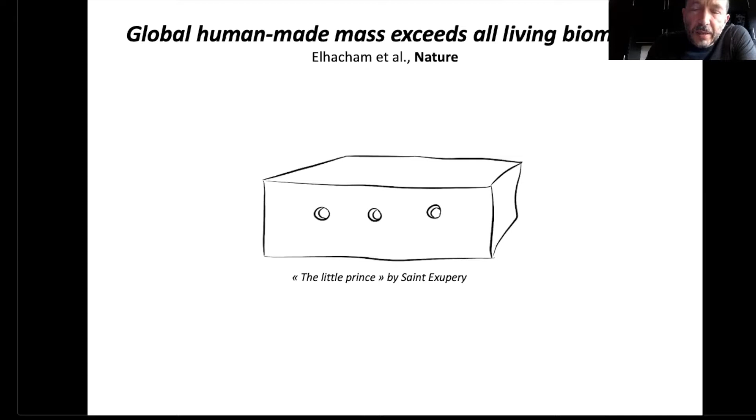A big fraction, probably more than half, of this global human-made mass comes from construction materials, as everywhere possible, we try, all of us, to provide people shelters or boxes to protect themselves from the environment. Among construction materials, there is one that is really leading and dominating, and this material is concrete, also called liquid stone.

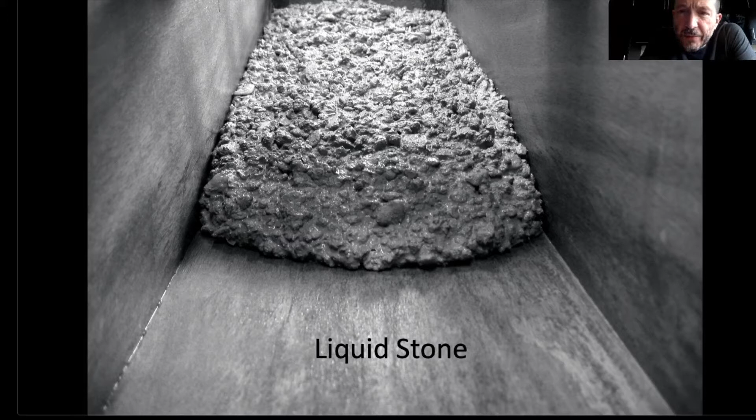Most of you are probably familiar with the stone features of this material, its hardened properties, its strength, and its durability. But today we'll focus on the liquid feature of this material, the way that it flows, why it flows like that, what is its rheological behavior, and what is the relation between fresh properties and processing or shaping of this material. So to do that, we'll have two parts in this lecture.

In the first part, I'll speak about rheology and the underlying physics at the origin of this rheological behavior. In the second part, I will focus more on material processing and try to show you that if we exclude pumping and mixing, which I will not speak about today, material processing or shaping for concrete is a competition between gravity-induced stresses and the consistency of the product.

Of course, it's a very large, wide topic. I won't have time to speak about everything. So I'm providing you here some keywords linked to this topic that you can use to find relevant literature, and I'm suggesting here 4 books, from the first, Rheology of Fresh Concrete by Tattersall and Banfill in the 80s, to the last one, Theory and Application of Colloidal Suspension Rheology, with a full chapter dedicated to cement-based material by Wagner and Mewis.

Let's start with something typical of rheometry, the flow curve. Flow curve is what people doing rheometry plot. It's shear stress as a function, not of deformation like we do for solids, but as a function of deformation rate, the speed at which you deform the material. What people also plot is apparent viscosity, the ratio between shear stress and shear rate, as a function of shear rate.

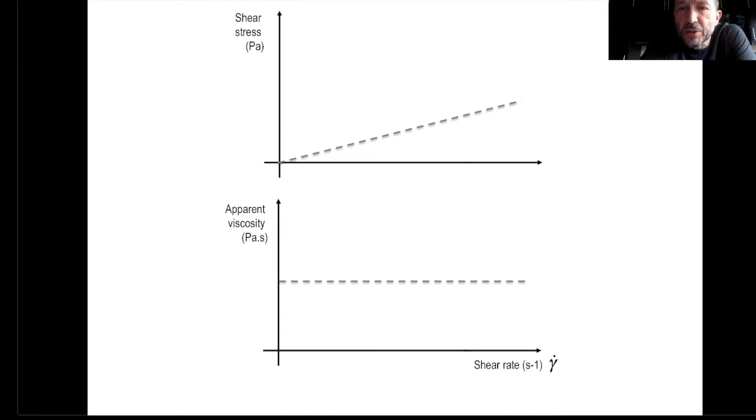So in such diagrams, water, a Newtonian liquid, would look like this: a constant apparent viscosity, a constant Newtonian viscosity, and of course a shear stress that increases linearly with the shear rate. Well, cement-based material looks very different.

The main feature that we will spend some time on today is the fact that this material displays a yield stress. This means you need to apply to this material a critical stress above a threshold for the material to flow. Above this yield stress, the material flows and its viscosity decreases with the shear rate, and this is called shear thinning.

If you go to higher shear rates, you can even reach a Newtonian plateau where the material looks like a Newtonian fluid, but this corresponds often to shear rates that are not of interest for industrial practice. So we are mostly facing a yield stress material with a shear thinning behavior above the yield stress.

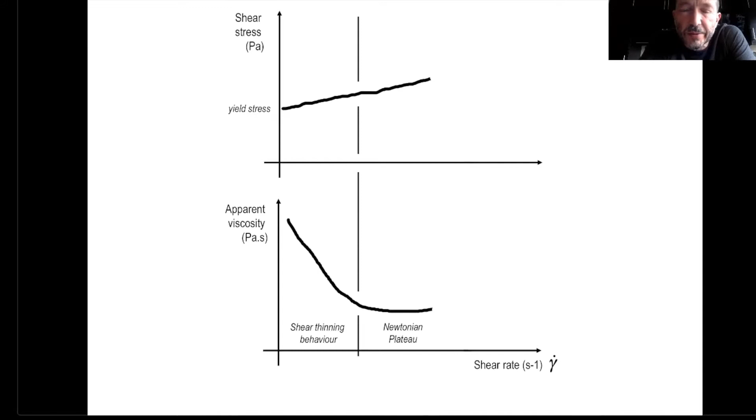Let's try to discuss the origin of such a behavior. To do that, I'm going to focus on the cement particles that are at the origin of the behavior. The sand grains, the gravel, have been shown to only amplify the behavior at the level of the cement particles. And we have at this level particles from 100 nanometers to 100 micrometers for the coarsest.

They are mixed with water. And the phenomena at stake that have been identified are Brownian motion or thermal agitation, gravity potential energy due to the fact that there is a difference in density between the cement grains and the liquid, and colloidal potential energy for this type of size.

100 micrometers is quite big for colloidal particles. 100 nanometers is really a good range. And these create some non-direct interactions, repulsive or attractive.

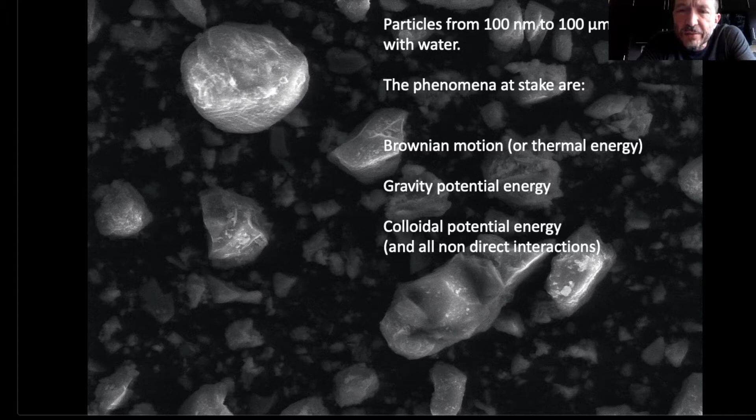In the case of cement, all these phenomena are studied in detail. So we often choose to consider as a reference Brownian motion or thermal agitation, because it's something that can be easily assessed. And we have as well some colloidal interactions. They were shown to be mostly attractive van der Waals forces.

In fact, they do not take much into account the diameter of the particle. They are more concerned with the diameter or the equivalent size of the asperities on the surface of the cement grains.

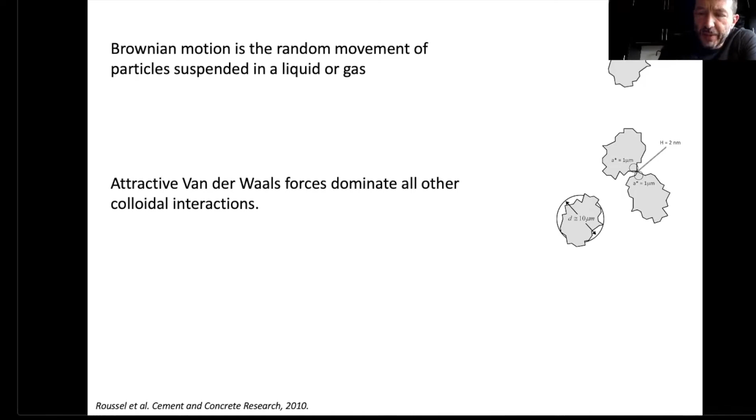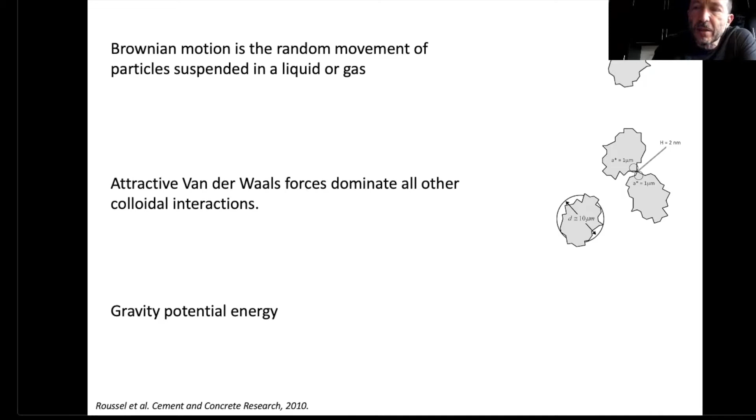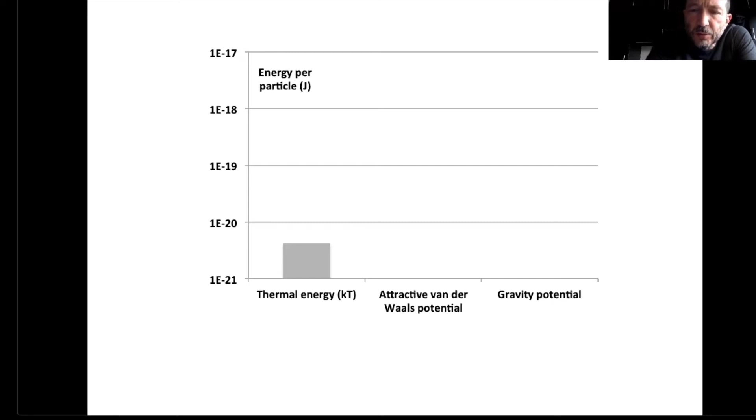And we have, as already discussed, some gravity potential energy that could induce sedimentation of the cement grains. It is possible to get an idea of the magnitude of these various energies or potentials and to compare them. That's what we do here. As already stated, I take as a reference the thermal energy, kT, K being the Boltzmann constant and T the temperature in Kelvin, and I compare that to the two other potentials or energies in the system.

First thing, gravity potential is systematically higher than thermal energy. This means that thermal energy is not able, through thermal agitation, to maintain the particles in suspension. As a consequence, cement suspensions are unstable by nature. So they do sediment, they do consolidate, and we expect these particles to be either too coarse or too heavy to be stable.

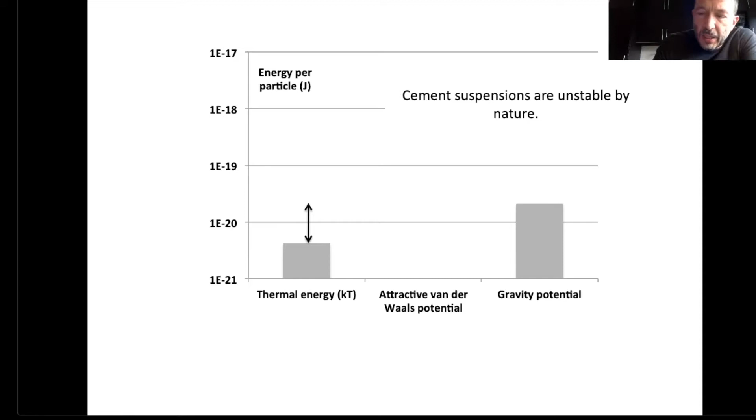In parallel, the attractive van der Waals potential is systematically far higher than thermal energy. So it means that particles will get attracted to each other and form flocs. And these flocs are stable, because thermal energy is not able to destroy this floc through thermal agitation or thermal dispersion.

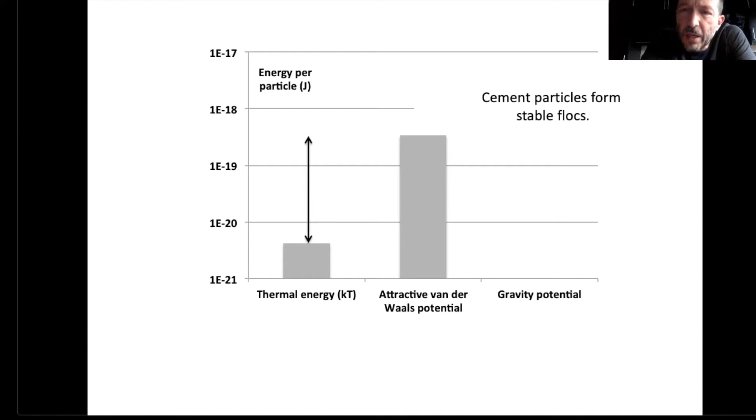Finally, if we have enough particles in the system and they get percolated through the formation of this stable floc, then the system will get a macroscopic yield stress that you will need to overcome for the particles to move relatively to each other and for flow to start.

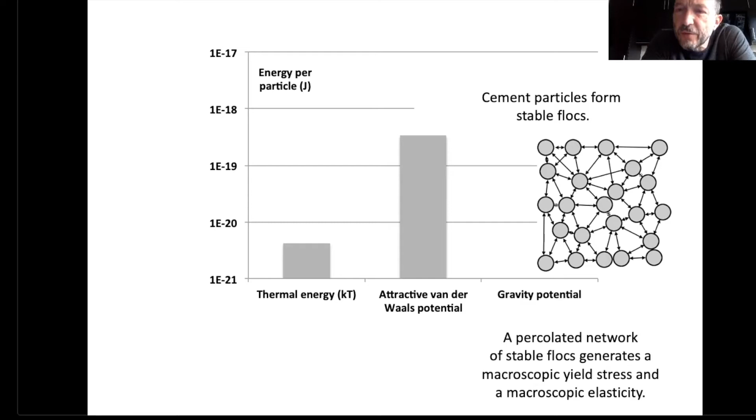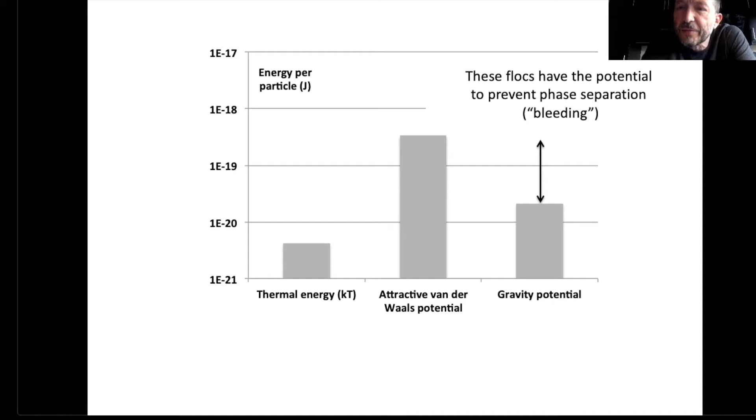And last but not least, gravity potential is systematically lower in magnitude compared to the attractive van der Waals potential. It means that the flocs being formed are stronger than the gravity-induced potential, and these flocs have the potential to prevent phase separation or bleeding and make the system stable.

So all in all, cement pastes are unstable by nature because cement grains are either too heavy or too coarse to be suspended in water. But particles do flocculate because of some attractive van der Waals interaction at the level of the cement grain surface defects or surface asperities. If there are enough particles in the system, meaning a water to cement mass ratio that is low enough, the network of interacting particles is at the origin of a yield stress.

And this network is so strong that it is able to keep the particles captured, preventing them from moving, which allows the system to become stable and which allows providing a cement-based material that can be used by industry because it is stable.

However, we cannot forget that cement powder is a reactive powder. And even if we are in the dormant period and all chemical reactions at this stage are often neglected, it has been shown that there is a lot of dissolution and a lot of nucleation. And this nucleation happens at the pseudo-contact points between the flocculated cement grains.

As a consequence, in the first 10 to 100 seconds, the particles will flocculate through a diffusion aggregation process typical of colloidal suspensions. And after that, the system will be reinforced by the nucleation of hydrates at the pseudo-contact points. So what matters for us and for the second part of this presentation is that after mixing or after flowing, when the material is at rest, we build a yield stress because of two mechanisms.

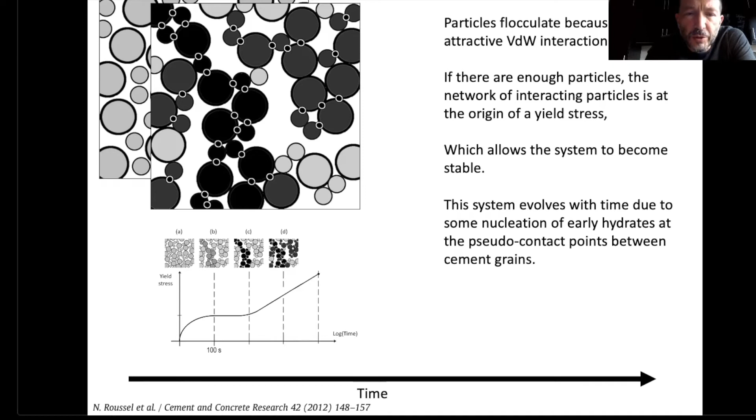One of them is flocculation, the second is structuration through nucleation, and all in all, the yield stress is increasing with time. So let's move to the second part, material processing, and I'm going to come back to this picture I used because I think it illustrates quite well the fact that concrete industry is mostly a molding industry.

So for a long time, the main dominating shaping process that we use is molding. In most cases, everything goes fine. Gravity, the density, the weight of the material induces stresses inside the material that are strong enough for the material to flow and fully fill the mold.

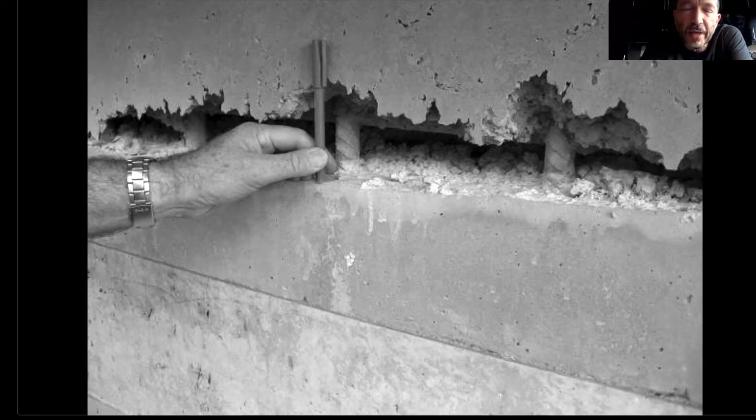In some other cases, unfortunately, it is not the case, and you can find some voids or some defects that even vibration is not able to make disappear. So to analyze that, the main idea of this presentation is to speak about gravity-induced stresses and compare these to the consistency of the material.

And we're going to have three parts. The first part, gravity is your only partner. Gravity is helping you shape the material. The second part, gravity is helping you, but gravity is not enough. You need to bring some additional energy. And in the last part, gravity becomes your enemy and consistency needs to be high enough to fight against gravity.

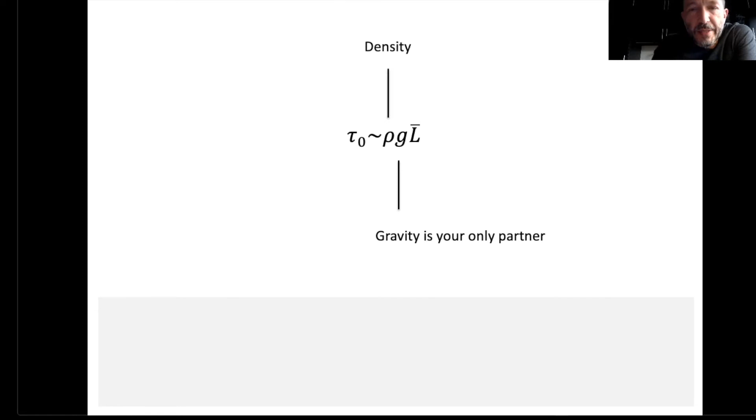So to do that, we're going to use only one relation. It's a very simple dimensional relation that opposes the consistency on the left and gravity-induced stresses on the right. So we are in the first case, gravity is your only partner. If gravity is playing a role, then density, of course, appears in the right part of the equation, and it is competing with yield stress or consistency of the material in Pascal. For this relation to be dimensionally correct, we need a typical length scale of the problem, and this length scale is teaching us many things.

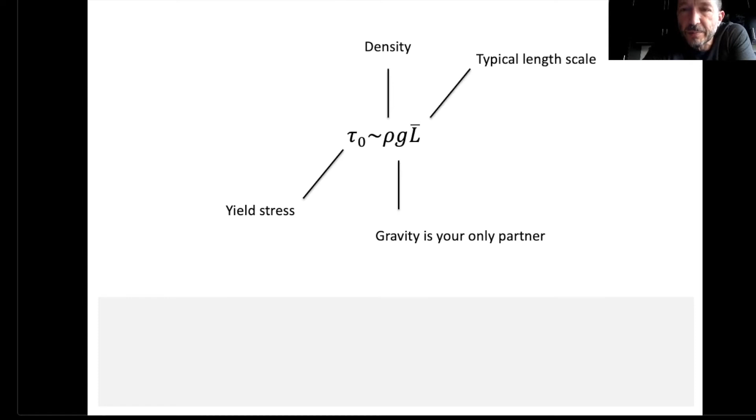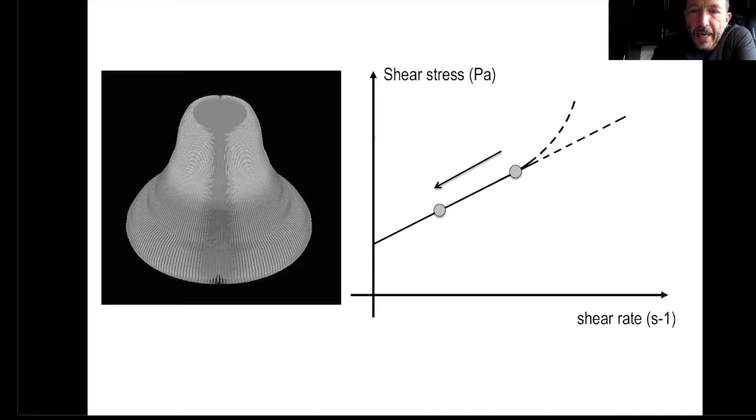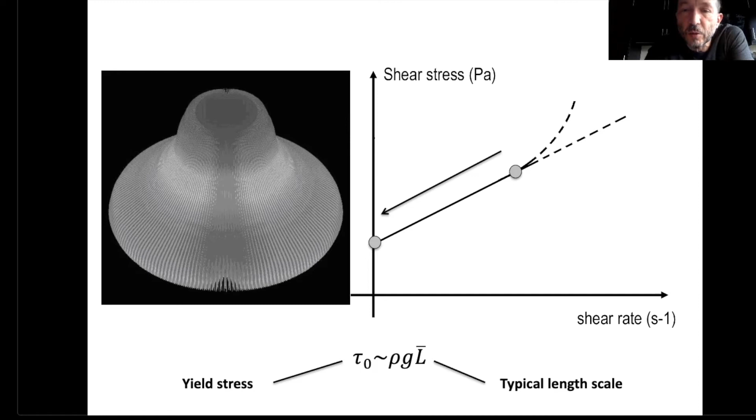First, an illustration of this relation is a famous test representative of the first attempts to measure rheology for cement-based materials: slump or slump flow. We have a material in a cone, then we lift the cone and the material flows, because the stress induced by gravity is higher than the yield stress of the material. So it starts to slump, and as it slumps, the typical length scale, here the height of the sample, decreases and the flow slows down. It slows until the stresses induced by gravity inside the sample equal the yield stress. This is an illustration of the basic relation between a length scale and a yield stress, and it explains why this test is so efficient at capturing the yield stress or consistency of a cement-based material.

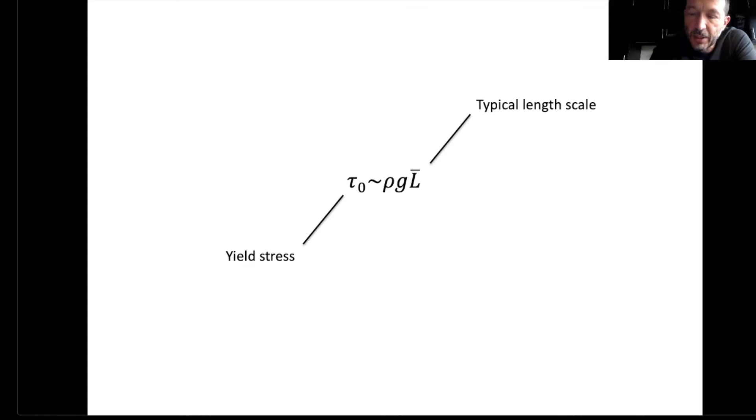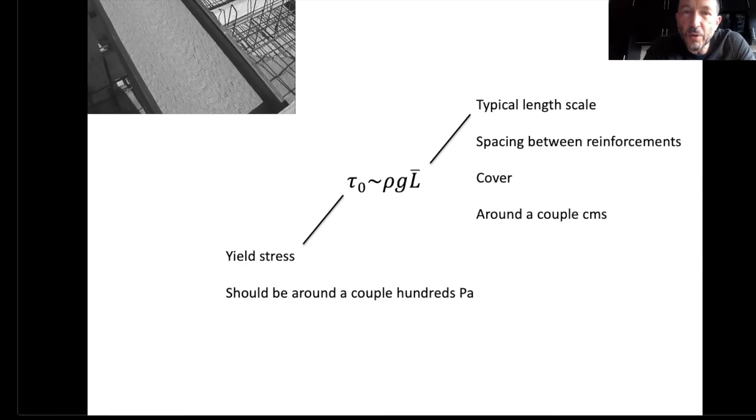Another consequence of this relation is so-called self-compaction. Coming back to the relation between yield stress and typical length scale: imagine the value of yield stress below which I can fill all the molds, including the delicate and narrow parts between steel bars. What is the critical value below which gravity will be sufficient to cast anything? This length scale is of the order of a couple centimeters, meaning the yield stress for typical density concrete should be around a couple hundred Pascal. And this is indeed the yield stress of self-compacting concrete or mortar—a yield stress so low that the material fills most formworks, even complicated ones, and goes through very dense steel bars.

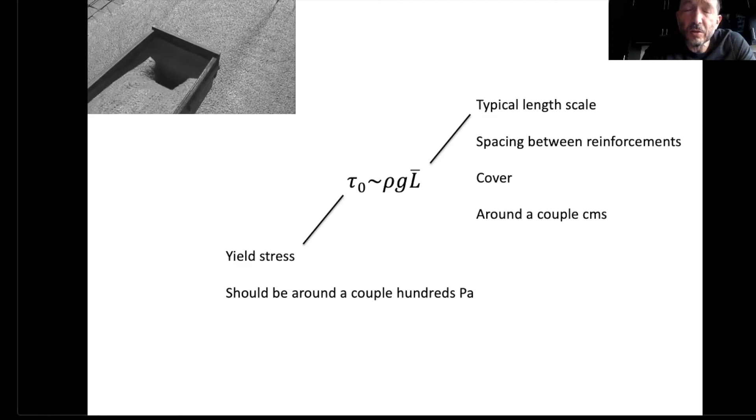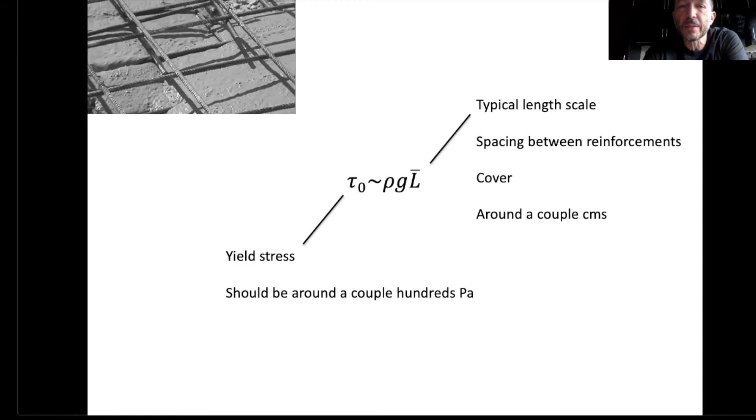But keep in mind we can't design materials with no yield stress at all. That would be perfect to fill anything, but with no yield stress we'd face the stability difficulty already discussed. We need a yield stress at the level of the cement paste for it to be stable, and this cement paste needs to carry the aggregate in suspension. So we will always need a minimum value for this yield stress. But if it stays lower than a couple hundred Pascal, we are able to fill most molds and formwork in most conditions.

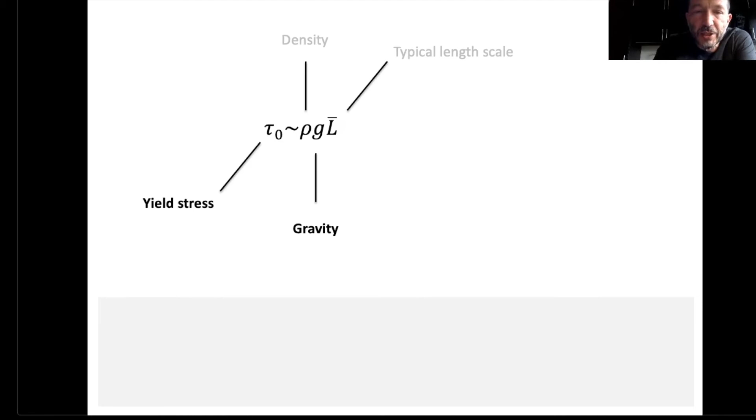Let's move to our second part, when gravity is not enough. Density cannot be changed—if you have difficulty casting a given cement-based material, you won't change density because of that. The typical length scale is imposed by the object you want to produce. So you can play on two things: yield stress or gravity. You could decrease yield stress using admixtures, which is out of scope for this lecture today. But if you don't want to change the mix design, you can change yield stress using internal vibration.

Internal vibration, the insertion of a vibrating poker inside the material, imposes locally a high frequency periodic shear rate, and it destroys the structure of the material—destroys the network of interactions at the level of the cement grains. The yield stress turns to zero for a short time, easing placement of the material, with of course the risk of instabilities if you vibrate it too long.

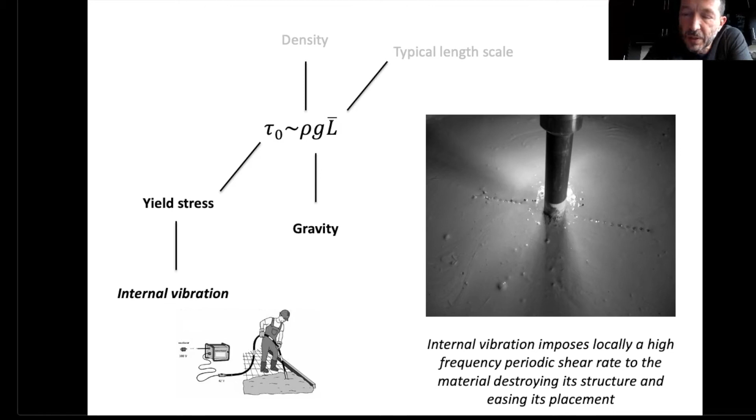The other possibility is external vibration. With external vibration, you don't touch the material directly, but you replace the acceleration of gravity with an artificial external acceleration, with a dependency on amplitude—often limited because we're trying to vibrate very heavy, very big objects—and on frequency. Here we're speaking about amplitudes around 1 millimeter and frequencies around a few tens of hertz. This, often used in precast, allows for perfect molding of the system when gravity is not enough for a full molding and full flow of the material inside the mold.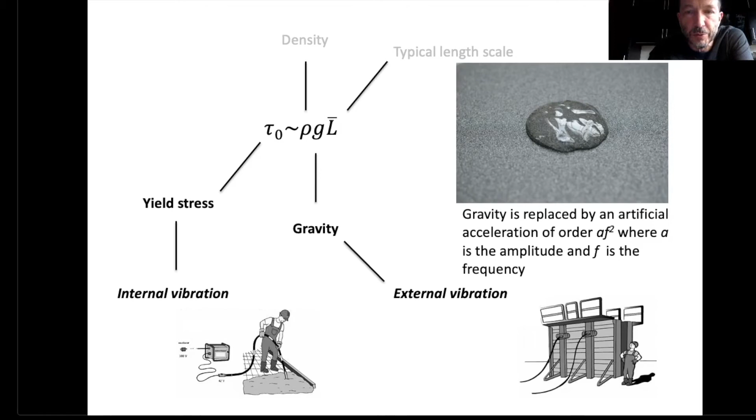The last part deals with the case where gravity is your enemy. The most obvious example is spraying, or rendering. You can apply a mortar, as shown here, or concrete for tunnel lining. In this case, the problem still uses the same relation, except this time the yield stress must be higher, not lower, than the gravity-induced stress. For the material to stick on the wall, for example a 2 cm layer of render mortar, the yield stress must be at least equal to 300 Pascal.

And this is the first case where you, in fact, have to fight against gravity. You want the material, because of its consistency, to be able to resist gravity, whereas before gravity was the stress pushing the material inside the mold and guaranteeing that your process and your shaping will be fine.

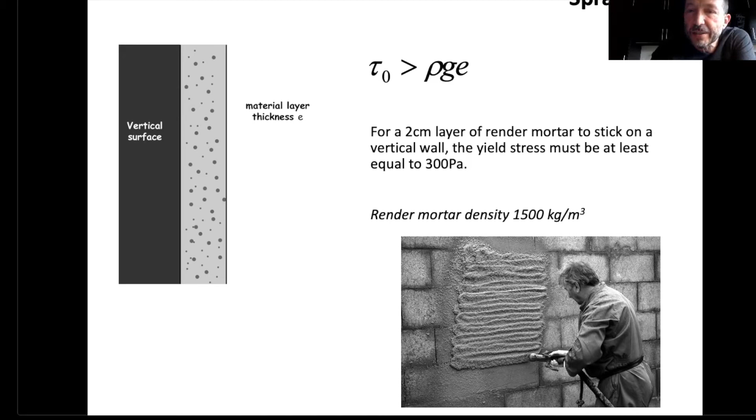The second example that is more recent is extrusion-based additive manufacturing, or so-called 3D printing. In such technologies, you have a robot allowing you to deposit material layer by layer until you build a 3D object from scratch, and the freedom of shape is amazing, and the possibility to build different structures is something that really needs to be explored.

I'm giving you here a few values about the layer thickness, which is called as well the resolution of the printing. 10 centimeters is when you print concrete, 1 millimeter you are mostly printing grout or paste. The layer width is varying as well. You can print up to 3 meters in most cases. We could go higher, but I don't have examples. And you can even print a house with a printing perimeter around 50 meters. And the printing rate, not for houses of course, but for columns, can go up to 10 centimeters per minute.

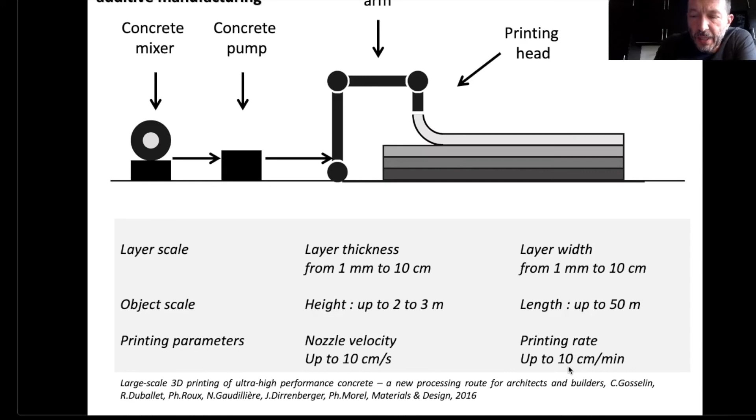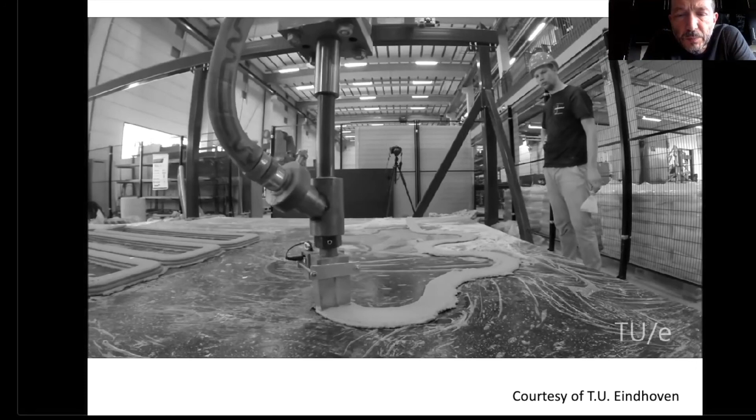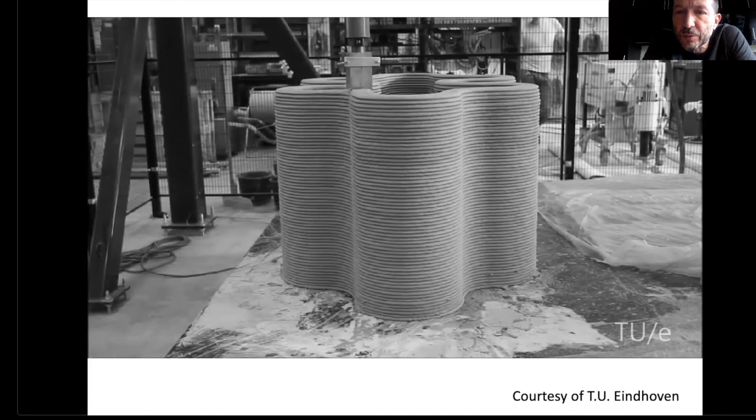Here I'm going to show you an example. This is the way that the material is printed at the Technical University of Eindhoven. We can see that first we need the material to have a yield stress that is high enough for the layer that is deposited to be stable, to have a controlled shape. But then the stress inside the system is increasing as you print, because you are superimposing layer by layer, and the gravity-induced stress is progressively increasing.

So let's first have a look at the yield stress that is required for the layer to be stable. We have two cases. Some people do free flow deposit where the material is very fluid and then builds up a structure because of thixotropy, nucleation, structuration. On the other hand, you have people printing in a mode called infinite brick extrusion, where the material yield stress is quite high, and the material shape is mostly controlled by the initial consistency of the product.

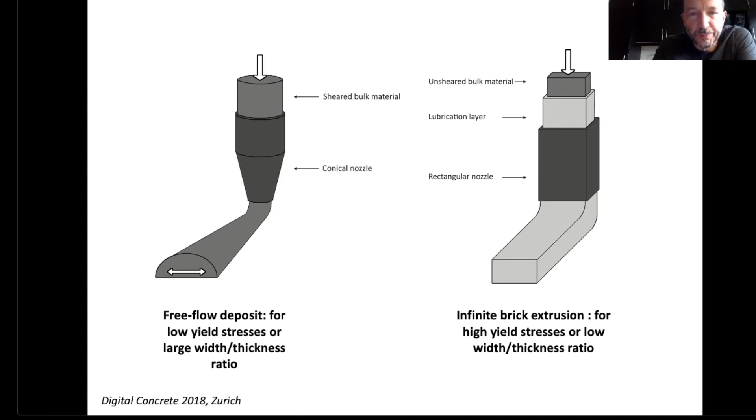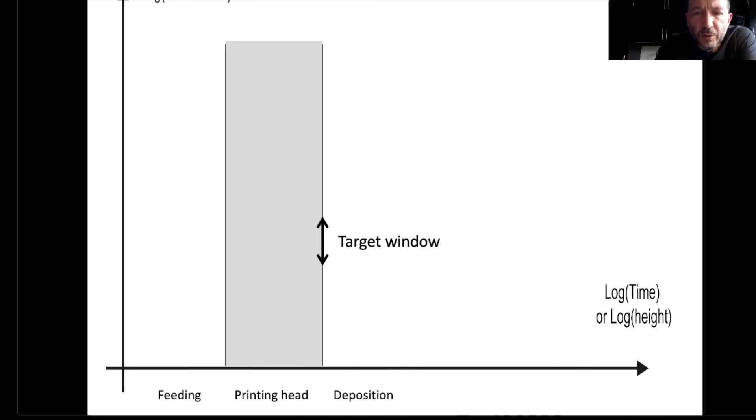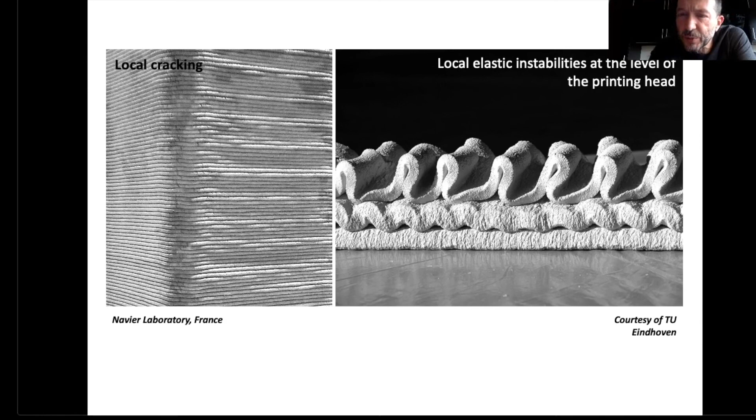Here we have, at the level of the deposition, a target window for yield stress. It means that the yield stress of the material must be high enough for the layer to have a controlled shape. At the same time, there is an upper limit because some artifacts or problems do appear when you have a material that is too stiff. For example, if your stiffness is too high, you can have some local cracking in the sharp angles being printed, also local elastic instabilities at the level of the printing head if there is a slight difference between the extrusion velocity and the robot velocity.

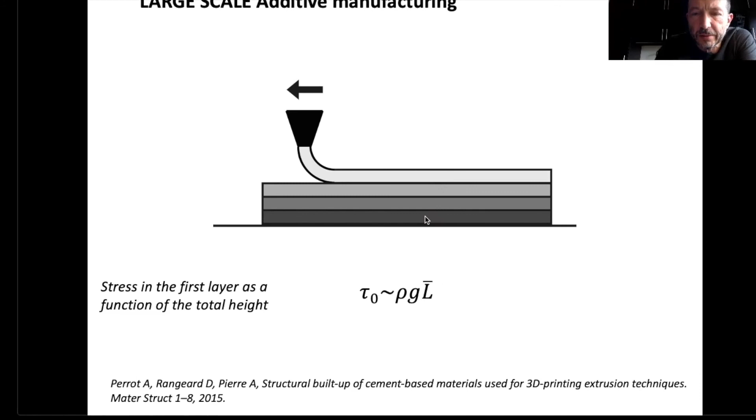But all in all, we can still apply the same relation between a gravity-induced stress, which this time is increasing with the number of layers that have been printed, and the consistency inside the first layer. This would require that the yield stress of the material increases linearly with the printing time or with the height of the printed element. So here we are facing a technology that requires different values for the yield stress, at least a value that is evolving with time, which is perfect for cement because cement naturally is changing with time as we discussed previously.

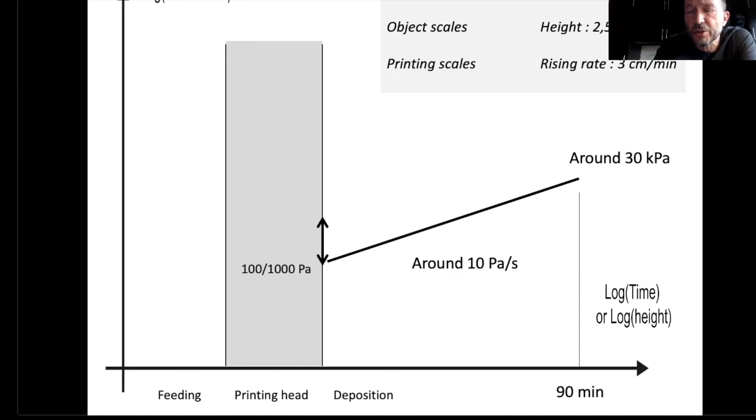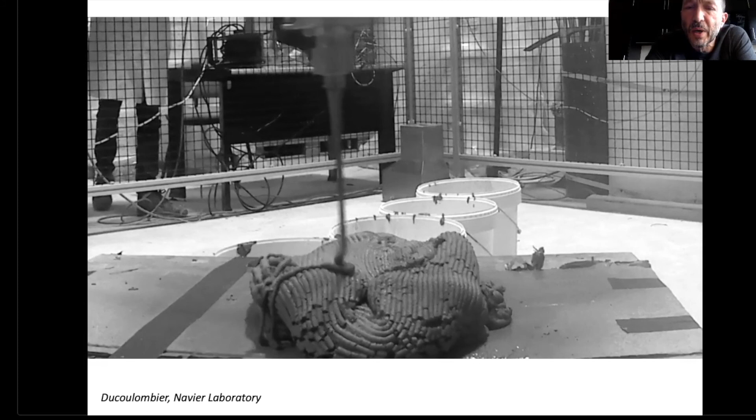However, the values you need to reach are quite high, so this kind of change is mostly induced by some chemical hydration or nucleation of minerals. The other problem is that the main reason for failure during printing is often not a plastic failure of the first layer. It is often an elastic instability, or so-called buckling, of the entire object being printed. This is called self-buckling. It is the same phenomenon that dictates the maximum height of trees on this planet.

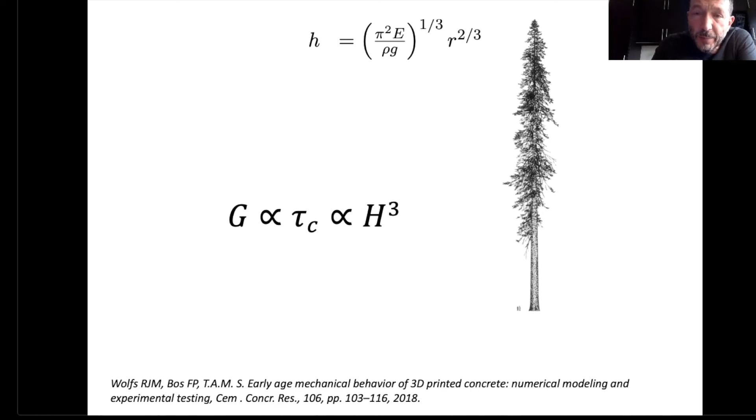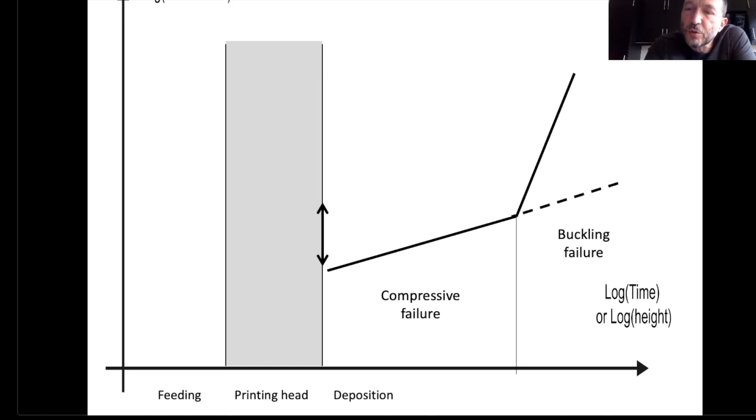The particularity of this is that for the first time it prevents us from using this very basic relation between consistency and a typical length scale, because buckling involves the height of the object at the power 3, not at the power 1. So it means that when you print, you need a yield stress that is in an initial window for the filament or layer to have a controlled shape. Then you need this yield stress to progressively increase with time or height so that it is able to support the weight of the layers above. But at a given critical height, you switch to a buckling failure regime that forces you to have very high values for the consistency of these materials.

So all in all, cement-based materials are yield stress and thixotropic materials. They build up a structure with time, either due to flocculation or nucleation of hydrates. Their yield stress behavior is dominated by attractive van der Waals forces, which prevent the material from being extremely fluid, but allow the material to be stable. The thixotropic behavior finds its origin in some hydrate nucleation at the contact points in the colloidal network, and adsorbing and non-adsorbing macromolecules allow for the tuning of the rheological behavior to the process, but that is something I will not talk about here today, though it is covered in one of the books I suggested in the introduction.

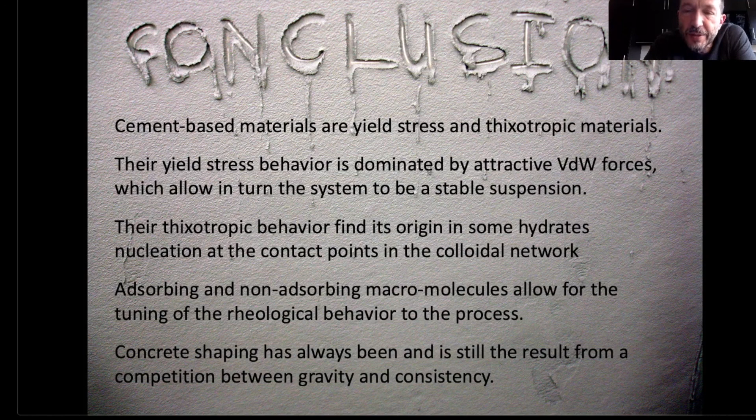And concrete shaping has always been, and is still, the result of a competition between gravity-induced stresses and the consistency of the material. And with that, I thank you for your attention.